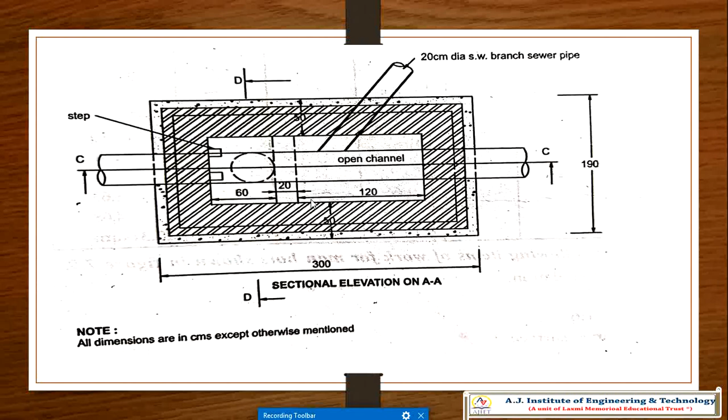This is the part 5 video of quantity surveying and contract management. Today we are going to deal with the topic of estimation of road work. One of the important factors that is considered is estimation of road work, especially whenever you are in the field. Quantity surveying is the most important part. If you consider a highway project, highway or NHAI, any kind of road construction project, you have to know how to estimate the road work as a quantity surveyor. So we'll discuss today the estimation of road work.

So in the estimation of road work, what is the main factor involved? If you have a land, for example, the land may be in terrain, in plain, or in mountain. You are going for a construction of road. What is the function of the road? It is connecting one particular city to another city, district to district, state to state, or village to village. It connects people as well as goods for transportation. But for that we need to construct the road.

Before that we go for land acquisition. After land acquisition, we do the estimation of that road work: how to estimate whether the road is in cutting or in filling. Students have already completed surveying, that is highway project surveying. So I'll directly go to the topic, that is, volume of earthwork shall be measured. First we are going to do the earthwork. Here we are mainly dealing with the earthwork. How to take the earthwork?

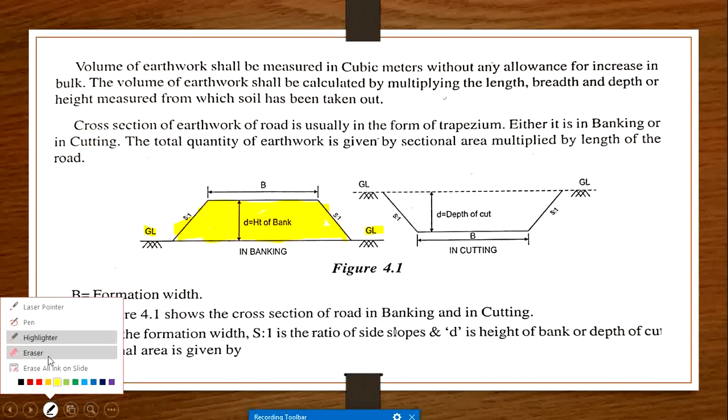In this case, the road is under cutting, because this is the ground level. This much portion of the ground you are going to cut. This is only the cross section you can see here. This is what we are going to cut. This is a freehand sketch, so concentrate accordingly.

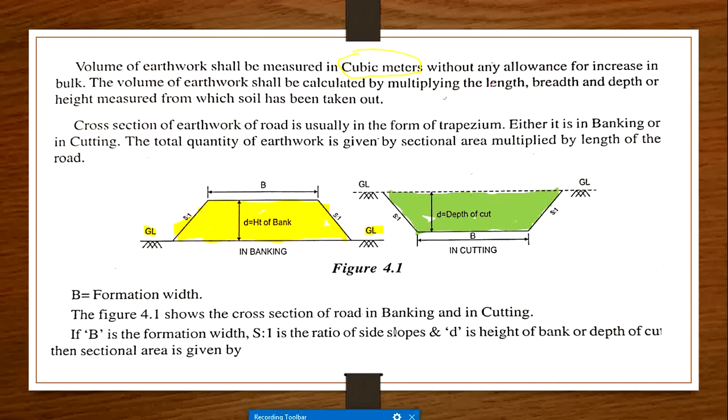Volume of the earthwork shall be measured in cubic meters without any allowance for the increase in bulk. So volume will always be considered in cubic meters. That means multiplying length, breadth and depth. In this figure, this is considered as depth and this is considered as breadth. Then what is length? Length will be the length of the road.

For example, in Karnataka, if you take Bangalore to Mysore, that is the length of the road. Maybe 1,000 kilometers, maybe 100 kilometers, maybe 300 kilometers. And this is the height, and this is the slope for the road. This is the formation level.

I'll take one board for you to understand in a better way. We'll go for a black screen. So now here, see this is, one minute.

This is the land acquisition we are going to take; this is the land. This is the earthwork excavation. Sorry, think that this is land, for example from Mangalore to Bangalore, or any other area, whatever it may be. This is just giving the example from Mangalore to Bangalore. This is a road. Actually, the earth looks like this: only the land, which is the ground level or profile of the ground, which you can see.

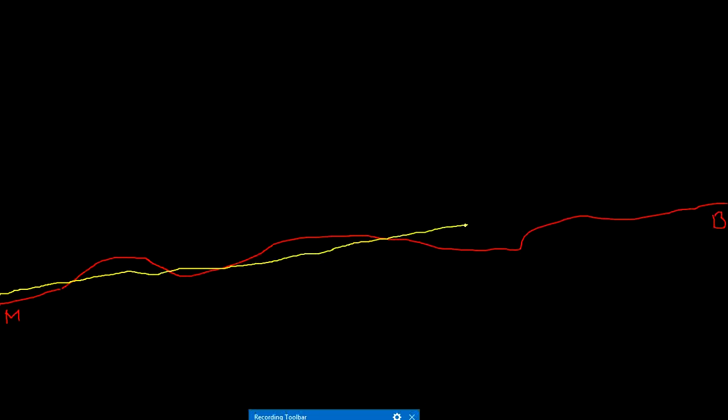So now I am going to give the formation level for this, meaning the road which has to travel. This is the formation level of the ground. So now here you are getting, you are getting here, this is...

What? Not able to see. This is a portion of... okay, it may not look here. Sorry.

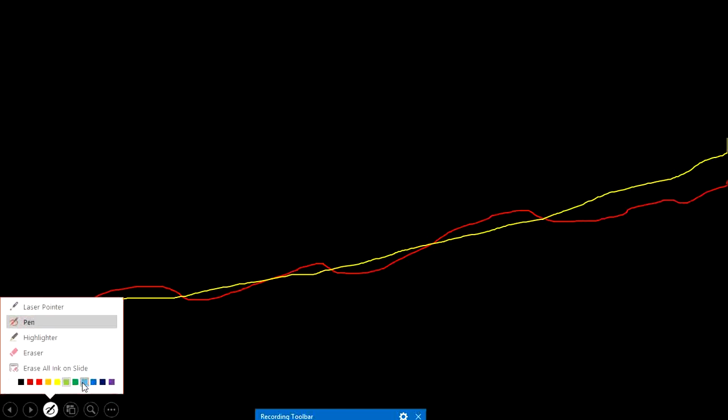So now here, this is the portion where the formation level is above the ground level. That means you have to fill it. So this is the portion of filling, and this is the portion of cutting. Okay, here the portion of cutting, and again so on.

This is the portion of cutting, and this is the portion of cutting. The green color which I am highlighting, that is the portion of filling. As you know, you are already aware of this, almost all the students who are studying estimation, because you should be aware; only then can you do the estimation.

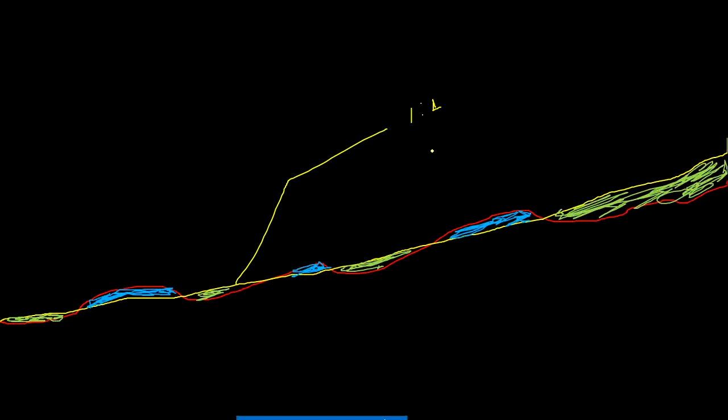So now maybe this is the formation level, right? Maybe slope 1 in 400 or 1 in 500 or till 1 in 1000, whatever it may be. It depends upon the terrain, the surface of the ground, whether it is plain, rolling, or whatever it may be. It depends upon that criteria. So now our duty is here.

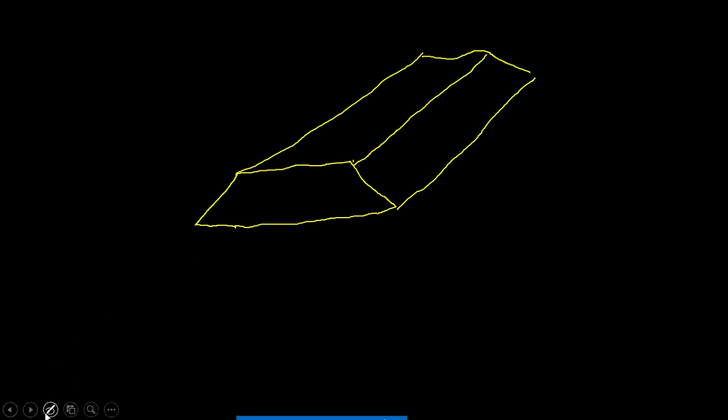To know, for example, how the road looks in cross section. Take a national highway or any road, just cut and look. For example, if the road is in filling, it looks like this, correct? This is the surface of the road. This is the slope of the road. You can see it. For example, this is the actual ground line, the actual ground level.

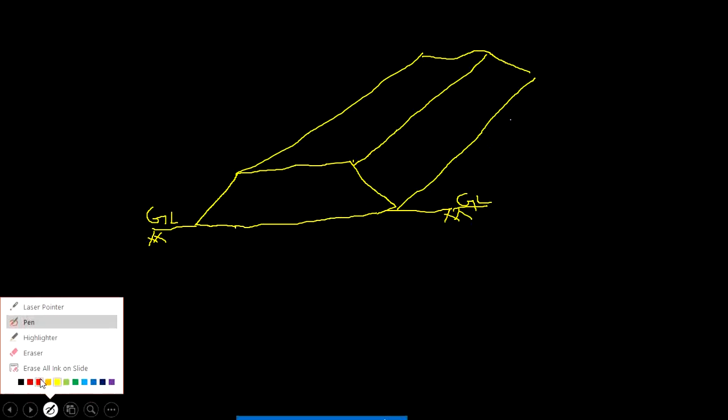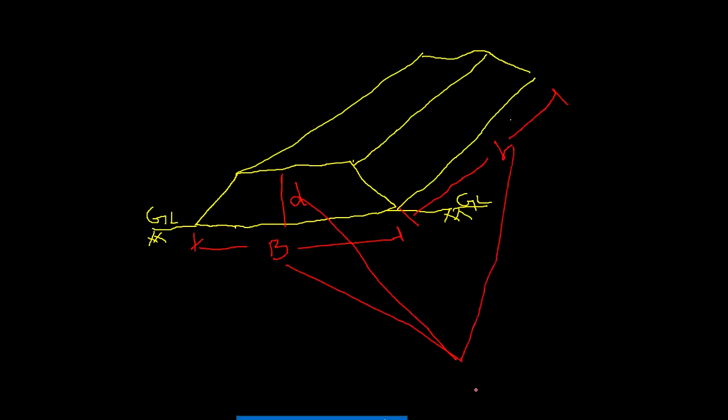Now here, this is the section of the road. This is the breadth you have, this is depth, and this is length of the road. This much portion we have to fill. This total becomes the volume of the earthwork. That is what we are going to do in road work earthwork calculation.

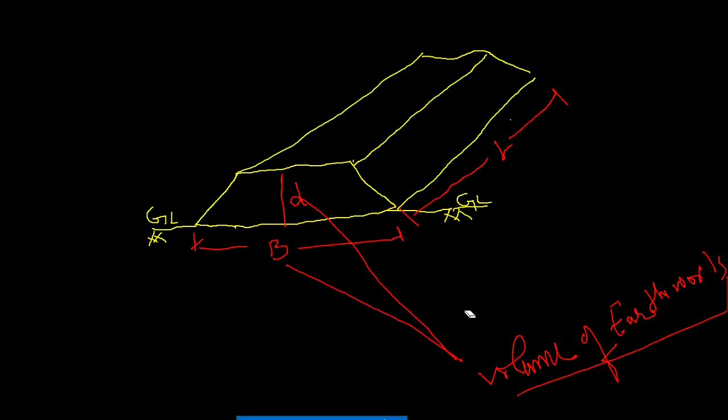Now in estimation of road work, the first duty is to find the volume of earthwork. Clear? So how to calculate the volume of earthwork? There are many methods to calculate. See, you may not get the same depth. For example, in this way you may not get the same depth. So at that time what will you do?

For example, here maybe filling. Usually breadth will be the same and the formation level of the road will be the same, but depth will not be the same. Maybe here D1, maybe here D2; from here to here the depth will be different, as per the land formation line. The formation line I showed in the figure. This is the line where we are going to construct the road.

So now this is banking. For example, our cross section is under filling. Just I'll highlight it in blue. This stage. So wait. This is the ground formation, maybe like this. One minute, just erase it, it's not proper.

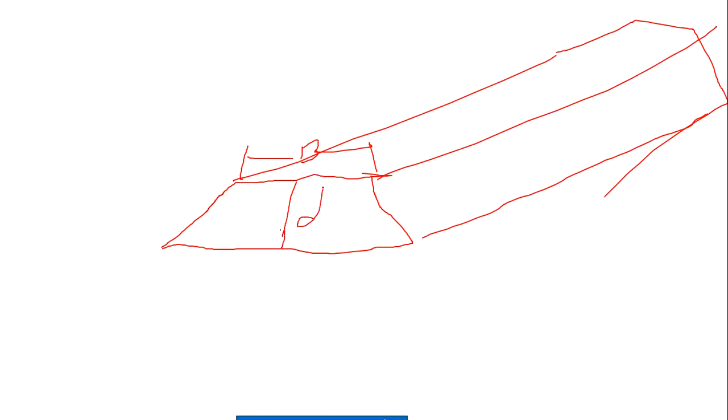This is the breadth. I gave that time by mistake. So now this is the length which has to be formed. So this is breadth and this is the total depth. Okay, and this is the length to be formed. So now we'll go back.

So here, see here. So now how to calculate the volume, or total quantity, for this? I'll draw a figure for this particular item. So here, this is under banking, right? This is under banking.

So now in this case, this is the ground line. Okay, this is ground line. So this is the road formation, the formation of road. It should be straight actually. Okay, this is B, this is D, and this is L. I need to consider this is the length of the road.

So now how to calculate the volume of this particular road? I'll take portions. See, this is one portion. This is one more portion, right? So now here, if you highlight, this is the triangular portion, right?

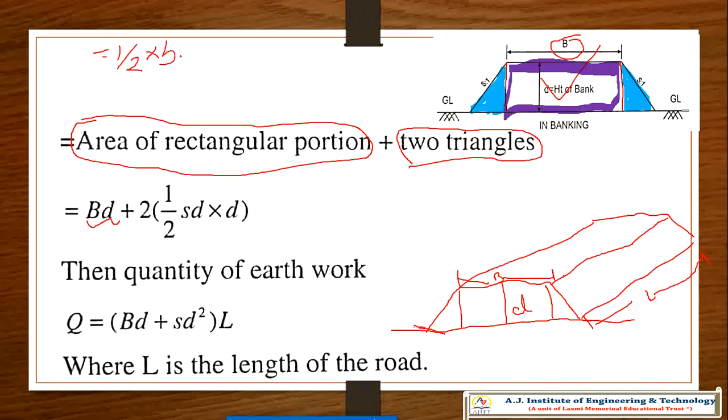So what is the area of the rectangular portion? This is B, so B into D. And for the triangular portion, area of a triangle is equal to half into base into height, right? So now why 2? There are two triangles, one here and one here.

So area of the triangles is 2 into half into base into height. Base into height is equal to SD into D, because we are not knowing this length. So this length is the base. If you take this as theta, this will be the depth, and this will be S. So this length will be S into D. That is your trigonometrical calculation.

That is hypotenuse, adjacent and opposite. That is your SD. So this is SD, this is base and this is height. So that is 2 into half into SD square. Then total quantity or volume will be BD plus SD square into L. L because this is area.

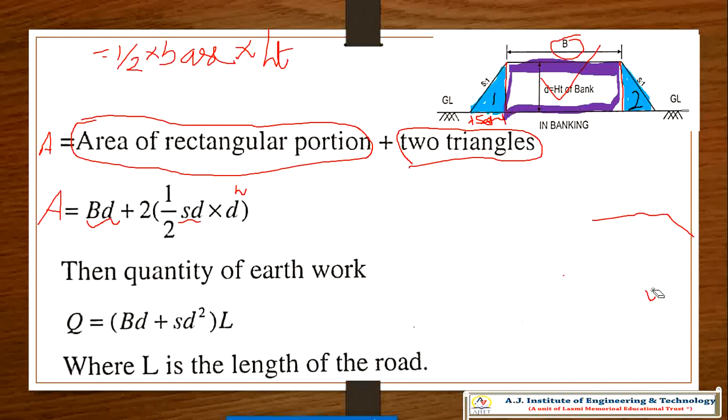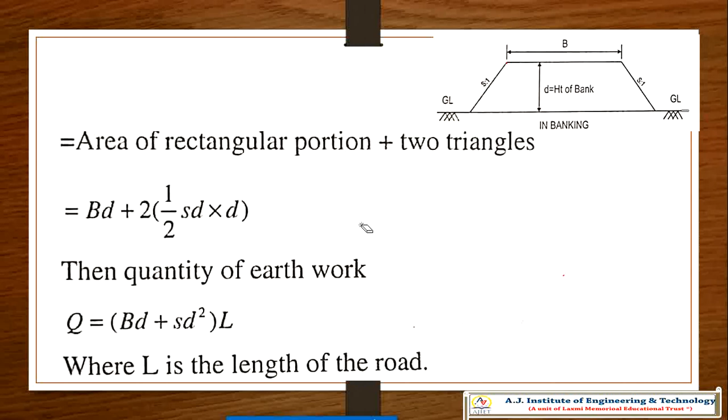Now we will move on. There will be some methods to follow. We just got the cross sectional area for this length. Okay, but the D, as I told, will be different for different situations, right? For that we have to consider which methods. So we have three methods.

Mid-sectional method, that is mean depth method. Mid-sectional means mid-sectional area method, or mean depth, we can call it mid-sectional area method; and mean sectional area method or mean area method; or prismoidal method. So this is also called mean depth. We are taking mean depth. Or this is also called mean area. So there are three methods: mid-sectional area method, mean sectional area method, and prismoidal area method.

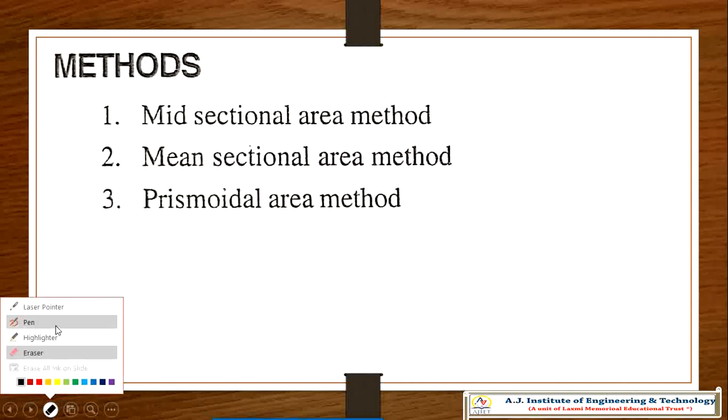So now here we are going to concentrate on the first method. What is that mid-sectional area method? Sorry, mean depth method. Mid-sectional area method or mean depth method. See here, for example, now I am going to concentrate on mid-sectional area method or mean depth method. Here we are taking the mean of depth. Okay. So now I'll show you one good explanation.

So just see here, this is the area and this is the length of the road. Okay, and this is a ground line, and this is also a ground line. So this is in banking. Right? So now the banking, you will come to know when it is in cutting, how it will look like.

Cutting means your ground line will be here, at the top, right? Your ground line will be here, your road will be here. It will look like this. Means you are going to cut the earthwork. You are going to cut the earth. So your ground profile is here. That is ground. You are going to cut the road. You are going to fill the road, isn't it?

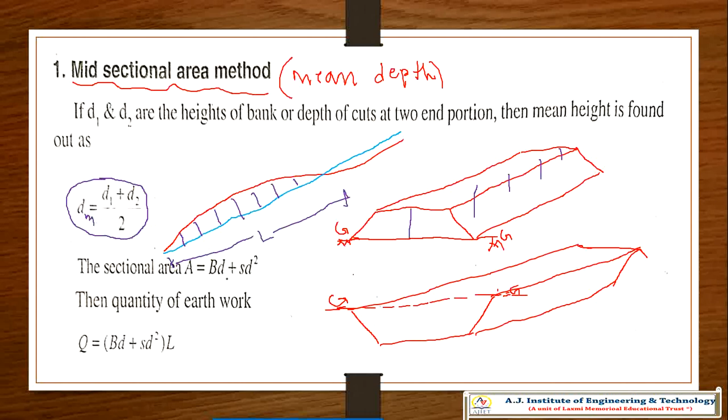If D1 and D2 are the height of the banks or depth of cut at the two end portions, then the mean height is found from D1 and D2. So then total sectional area is equal to BD plus SD squared, as you know. That D should be DM. So then in the mean depth method it becomes B times DM plus S times DM squared. So that is the mid-sectional or mean depth method. Hope you understood.

Same way in the cutting, there are no changes. Cutting also will change. Like this it will be going on. But when you consider the cutting, it will be coming below. Here it will be coming. That is the cutting. Okay. So this is about your mean sectional area method or mean depth method.

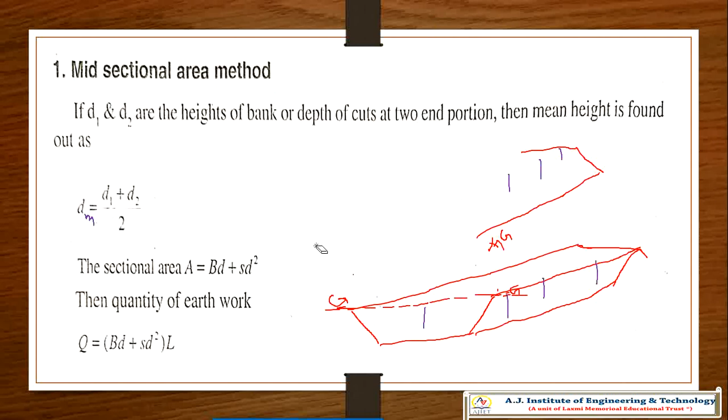So now, I need not draw again. So if D1 and D2 are at different sections, then the sectional area of the two end sections will be different; we are taking a different area. So now, for example, area is considered as mean. That time depth is considered as mean. Now if you need, I'll draw one more example for you. Banking or cutting, both will be the same.

So this is the ground line. This is the formation width, with a particular formation and a particular shape. So now I'll draw a line here. Draw a line. Okay, if some error is there, this is only a freehand sketch. Please take it easily. So now here, see, this is one area and this is one area. Area we are taking as mean. Sorry.

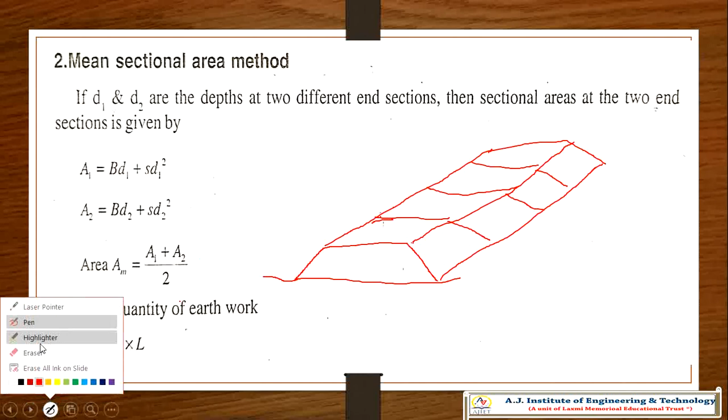See, the line has to be drawn in such a way that it's correct, no? So it has to come like this. One more time I'll repeat it. So whatever I have drawn here has to go like this only. Like this. So consider this is the area, one portion of the area. We are taking area as a mean. This is the area we are taking as a mean. So now I'll take a highlighter for this particular area.

This one area, mean area AM, considering different depth D1. Here D1 will be different. So we are taking a separate area for this, and we consider a different area. Again here a different depth D will be there. And here we are taking one more area, with different D2, D3, and one more area we are taking here. So on, the depth will change here.

That is, this is D1, this is D2, this is D3, this is D4, then this will become A1, A2, A3, and A4, and this is the mean area. This is the mean of A1 plus A2, so on. If you take this particular portion, then A1 plus A2 divided by 2 into L. If you come here, A2 plus A3 divided by 2 into L.

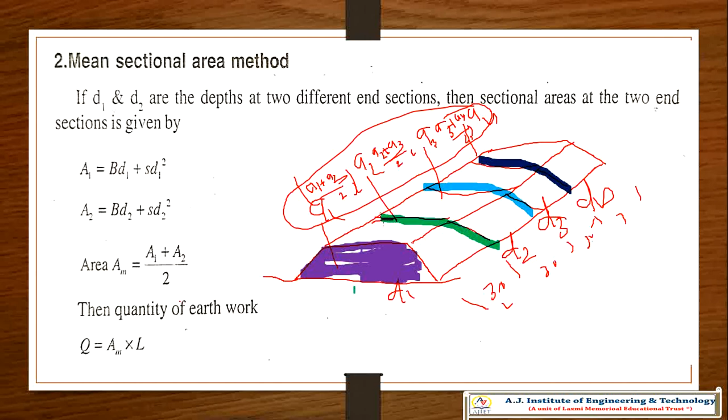If you take L as 30 meters, this is 30, this is 30, so on. So this is A3 plus A4 divided by 2 into L. So that is the total volume. So this is the mean area method. Okay, this is about your mean area method. Not much confusion, I hope. This is mean area method, and that is mean depth method.

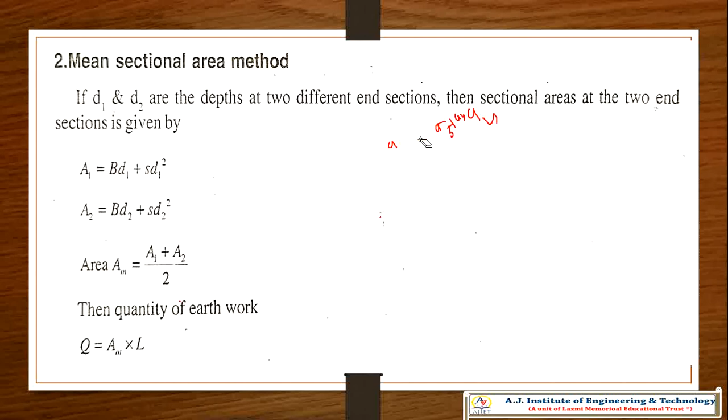And another method is the prismoidal method. Just follow the calculation of this prismoidal method. Everyone knows the prismoidal method: Q is equal to L by 6 into A1 plus A2 plus 4AM. This is a more accurate method than the above two methods, but earthwork is a cheap item, so method 1 is generally adopted. According to prismoidal, the quantity of earthwork is Q = L/6 (A1 + A2 + 4AM). This has to be considered, as I told in the last figure.

So this is today's video. Here we explained only the methods. In the next part, part 6, we will consider one problem calculation regarding this.